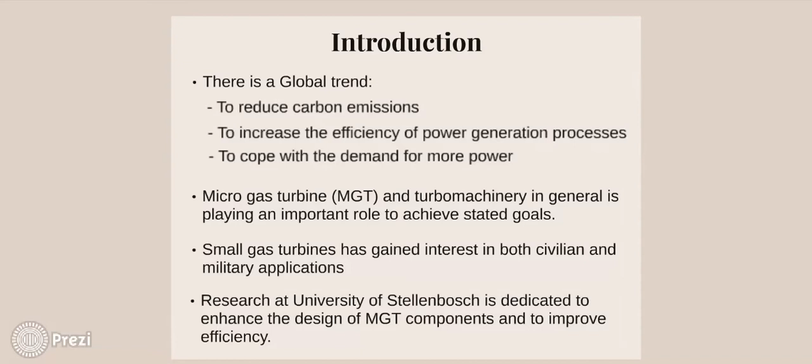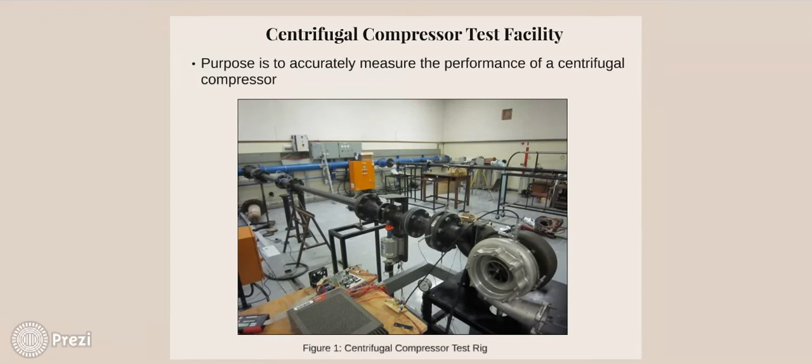There is ongoing research at the University of Stellenbosch to enhance the design of microgas turbine components and improve efficiency. For this project, my focus is mainly on the centrifugal compressor test facility, shown in Figure 1. In the facility, a turbocharger is used to drive a test compressor using compressed air. The purpose of the facility is to accurately measure the performance of a centrifugal compressor.

Objectives of my project included a detailed theoretical analysis to be performed on the test facility. A heating system needed to be designed that could provide enough energy for the test facility to reach speeds on the order of 120,000 rpm. The conceived design needed to be manufactured and assembled. Lastly, the design had to be tested.

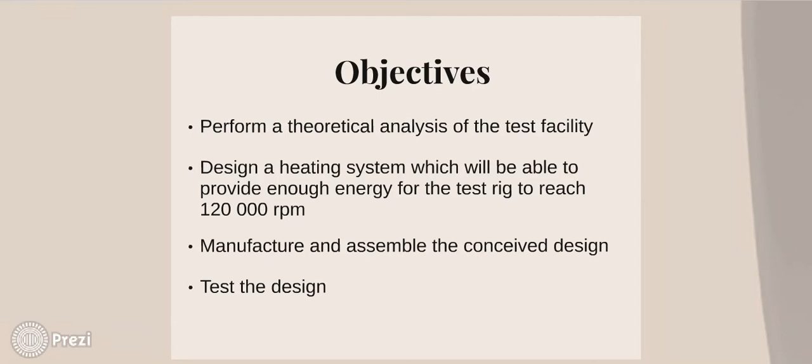As motivation, the test facility was initially designed to be operated with cold air. The use of cold air raised two major issues. Firstly, in order to achieve higher speeds, the facility must be operated at high pressures. Secondly, during operation, the turbine extracts enough energy out of the air, causing air temperature to decrease below 0 degrees.

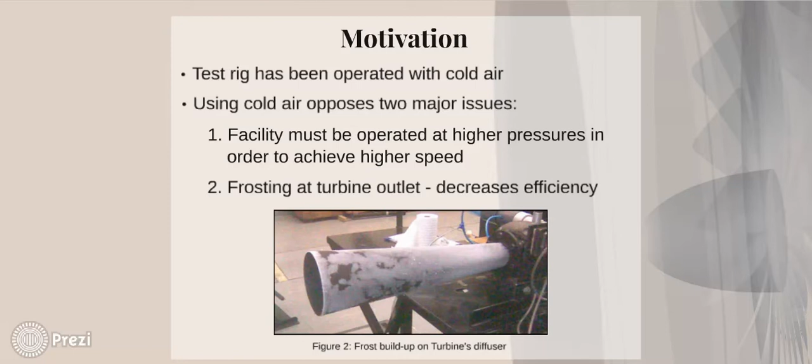This results in frost build-up on the diffuser and the impeller, consequently decreasing the efficiency and also the lifespan of the turbocharger.

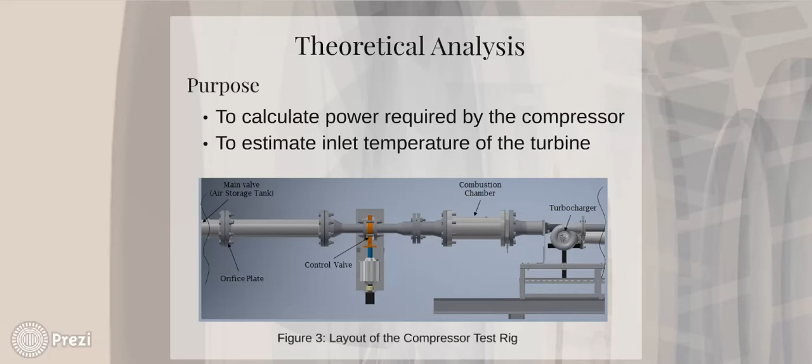For the theoretical analysis, I was given the specification of a new compressor design. A detailed theoretical analysis was done on the facility to determine how much power is required by the compressor. Also, the inlet temperature of the turbine had to be calculated to ensure the required power is delivered. The layout of the facility can be seen in Figure 3.

Theoretical analysis findings are listed in Table 1. It was found that the turbine needs to deliver 188 kilowatts of power to drive the compressor. To obtain this power, the inlet temperature of the turbine must be around 842 Kelvin, along with a mass flow rate of 0.45 kg per second.

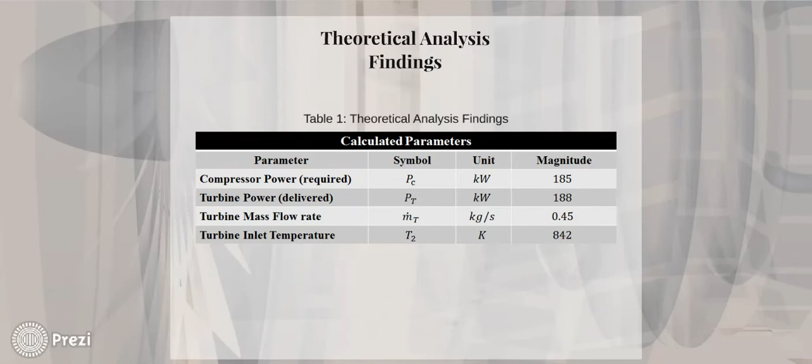For combustor design, previously a heater with heating elements was designed for a similar purpose with a power output of 36.75 kilowatts, and it was recommended that a heating system with a higher power rating is required. After in-depth research, a combustor was considered a viable option. This choice was further motivated by the Council for Scientific and Industrial Research, CSIR.

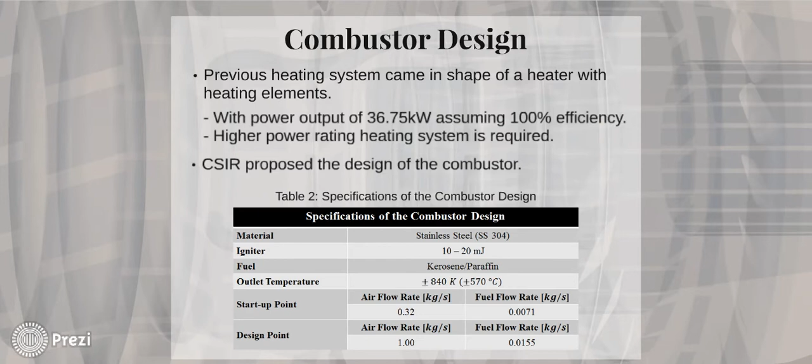In fact, I was given the specification of the combustor, listed in Table 2, with a rough sketch of the combustor. The rough sketch was converted into 3D models and the final product was manufactured and assembled.

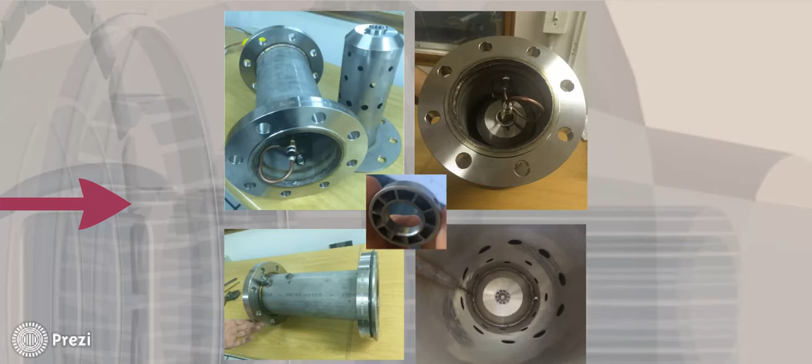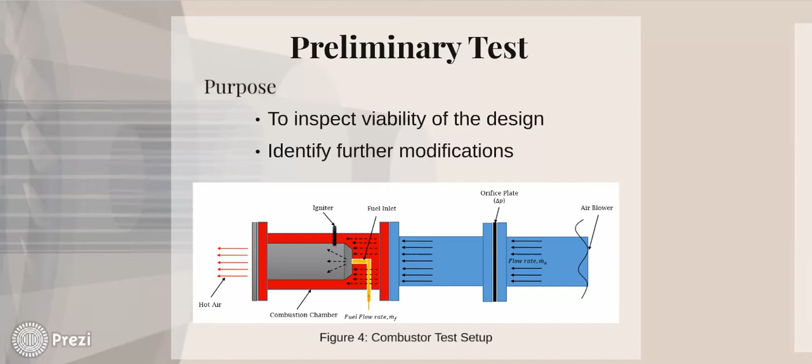Before conducting final tests on the combustor, a preliminary test was done to inspect the viability of the design and to identify if further modifications needed to be implemented. The test setup can be seen in Figure 4.

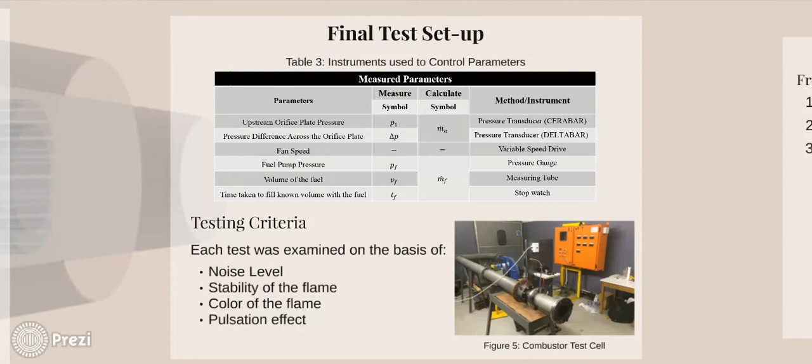For the final test, instruments listed in Table 3 were utilized to measure the respective parameters, ensuring the controllability of the combustor. The test was conducted in the combustor test cell shown in Figure 5. All test trials were examined on the basis of the following criteria: noise level, stability of the flame, color of the flame, and pulsation effect.

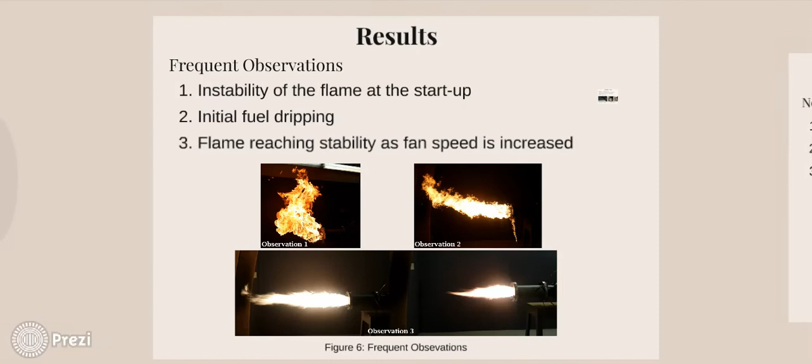Special attention was given to the initial dripping of fuel as it is a serious safety hazard. Three speculations were made regarding this occurrence. Firstly, leakage in the fuel pipeline upstream of the combustor. Secondly, the fuel nozzle is not atomizing the fuel properly. Thirdly, the position of the igniter is far from the nozzle, which results in a delay in ignition, furthermore causing the fuel to accumulate.

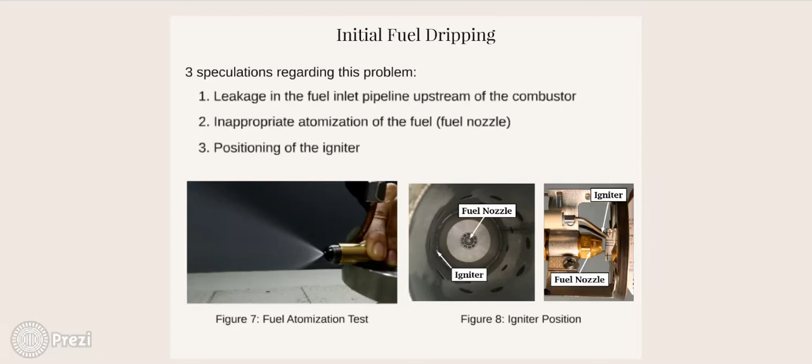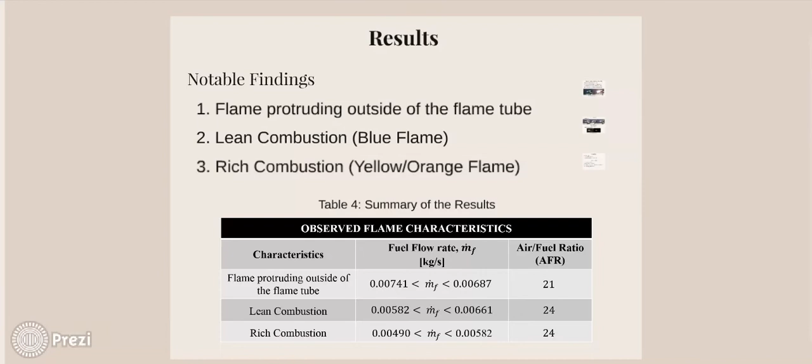With regards to flame protruding outside of the flame tube, this phenomenon was referred to as flame losing its anchor, which occurred at high fuel flow rates. After this occurrence, further increase in airflow rate causes the flame blowout. It was also observed that the noise level of the combustion decreases significantly. This phenomenon can be seen in figure 9.

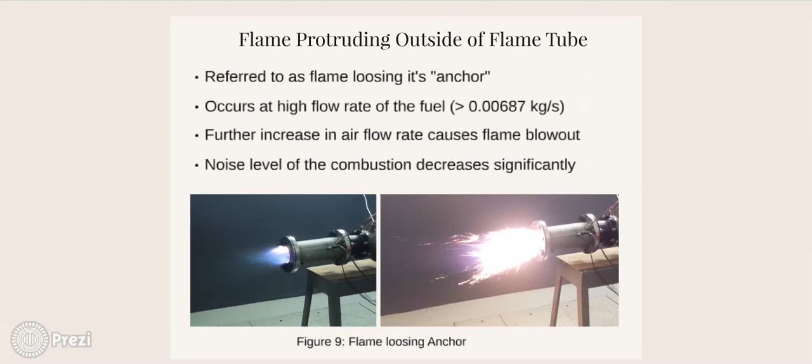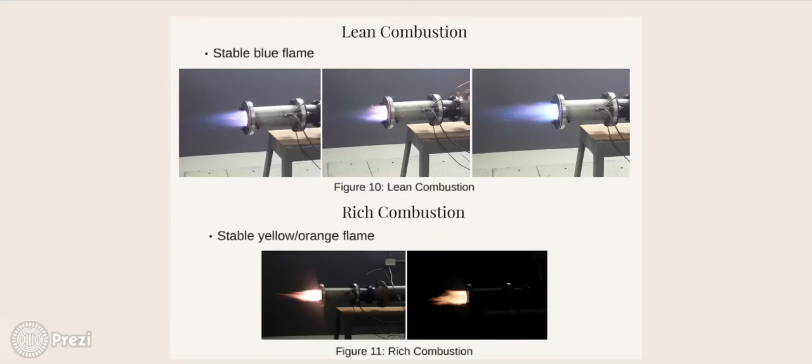A stable blue flame was achieved, which is referred to as lean combustion. It can be seen in figure 10. Also, rich combustion is shown in figure 11. It depicts a stable flame with a yellow-orange color.

With regards to the instabilities, throughout testing trials, a pulsating effect was noticed in the shape of inconsistent noise level and abrupt change in color of the flame. The following reasons were thought to be the cause of instabilities: inefficient fuel atomization, insufficient mixing of fuel and air, malfunctioning of the swirler due to manufacturing defects, and non-continuous ignition system.

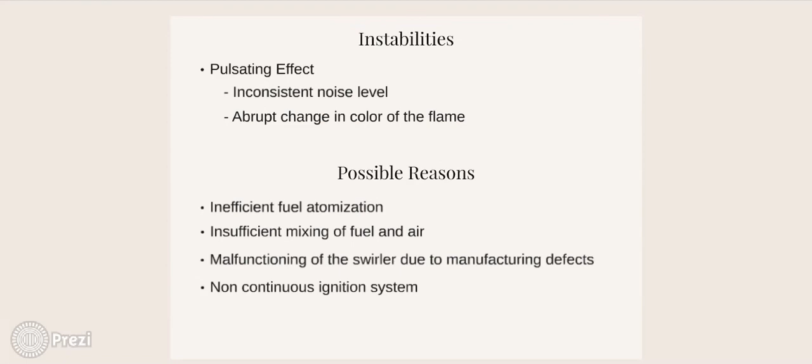In conclusion, safety concerns enforced limitations on the testing of the combustor. We had to use combustor test cells for the testing of the design instead of the centrifugal compressor test rig, for which the combustor was actually designed. The combustor test cell was limited in its airflow rate, hence the design parameters were not met. Despite all the limitations, the design was proven to be functional. Lean combustion was achieved, but due to instabilities, it could not be sustained for a long period.

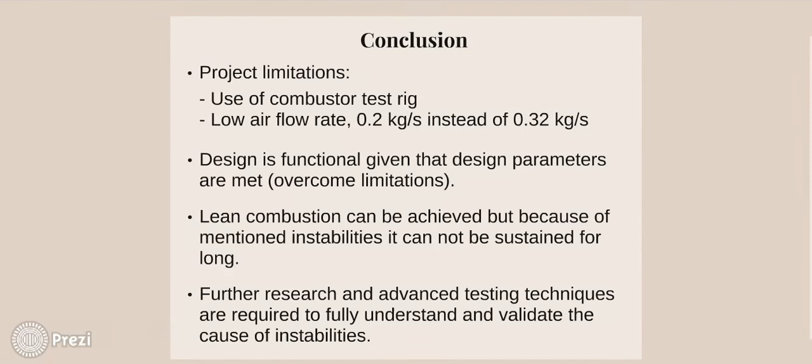To further improve the design and its controllability, the following recommendations were suggested. Firstly, a variable fuel nozzle must be used for the design to ensure effective variation of fuel flow rate. Secondly, a flow rate control valve is recommended to directly measure an accurate flow rate of the fuel. Thirdly, as mentioned earlier, the position of the igniter can be a possible reason for initial dripping of fuel. It is recommended to use an igniter electrode rather than a spark plug, as spark plugs are restricted by their length.

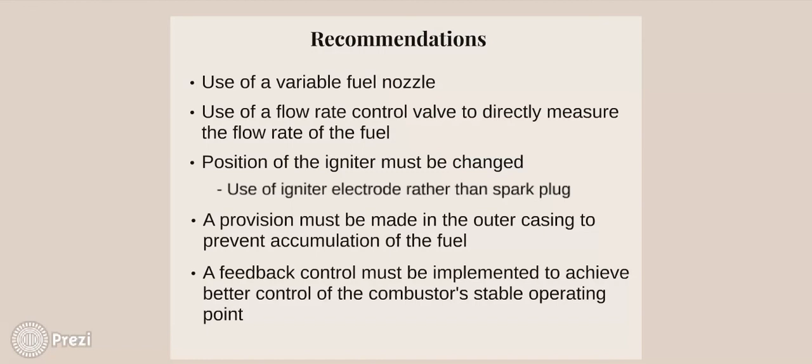A provision must be made in the combustor so that the accumulation of fuel in the outer casing can be prevented. This provision will make sure that the fuel found in the combustor's outer casing is drained. Lastly, a feedback control must be implemented to achieve better control of the combustor's stable operating point.

I will end my presentation with a video clip which is one of the test trials on the designed combustor.